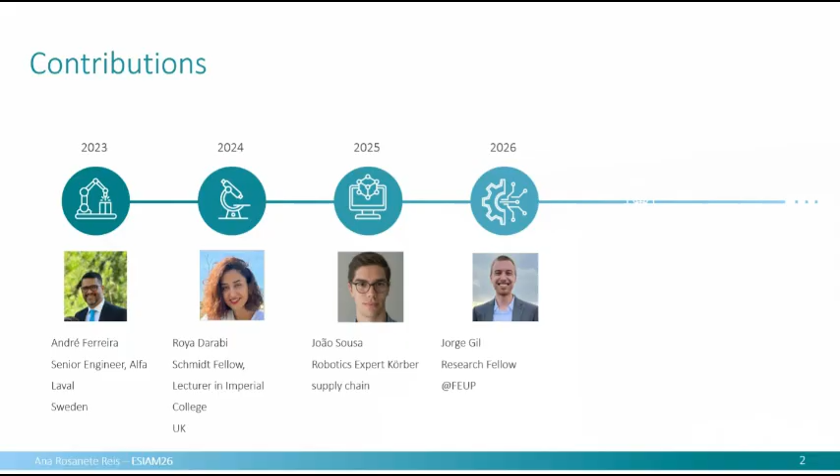So my role here is just to present our framework and to try to make some connections about all this work and probably works that each of you in some layer are doing. So that's how I will start. I will start from process physics. Everything that I will show here is about directed energy deposition for repairing. So this is the focus of our work.

The first part will be mainly about deposition, getting to know the process, a lot of test and trial, and understanding all the implications between material, process parameters, and what you want to know, melt pool, and then affected area, everything comes from there. And then we tried to predict something. So we try to go from physics to prediction.

Then I will show you our multi-scale modeling attempts to try to understand everything. At the same time, we understand that we need to control the process. We need to have actual autonomous control, not just fixed control. What we want is to have less defects and have a controlled process. So we went to machine learning.

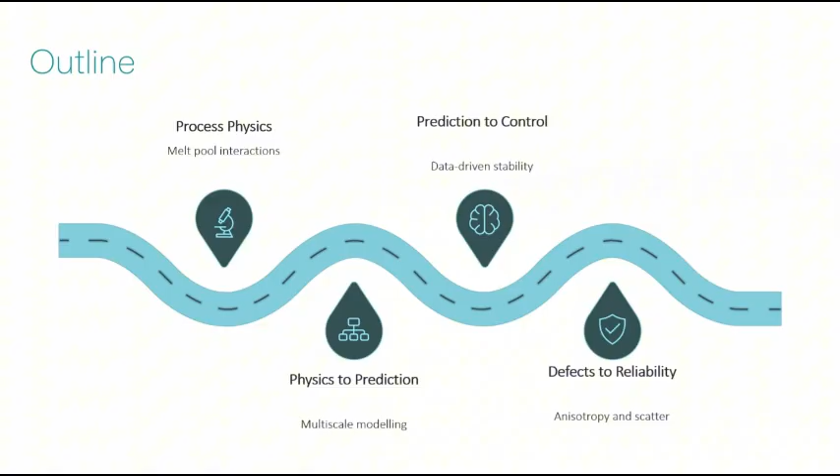And finally, we were studying and understanding better the defects to reliability, the work of Gil. But just for a very quick introduction. The title of my presentation is towards sustainability. It's a nice keyword, everybody likes to use this, but we need to understand how it can be sustainable.

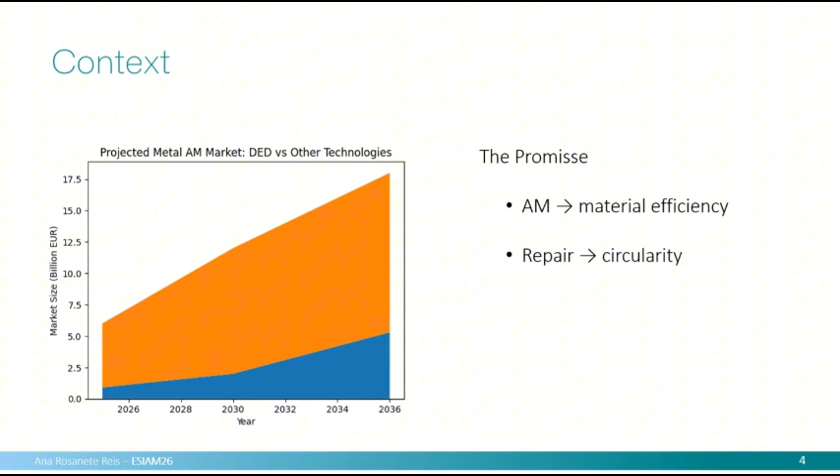Of course, if we are talking about repairing very expensive and high-end components, repairing for sure is a very good idea. And AM brings that background that we expect to work. But still, we need to fulfill one main question, that we keep reliability. I will present also some particular industrial cases that we've been studying, but mainly you have there the potential. It's better than cladding because we are using laser, so you have more control of the process. We have better control of the dilution, of the heat affected zone.

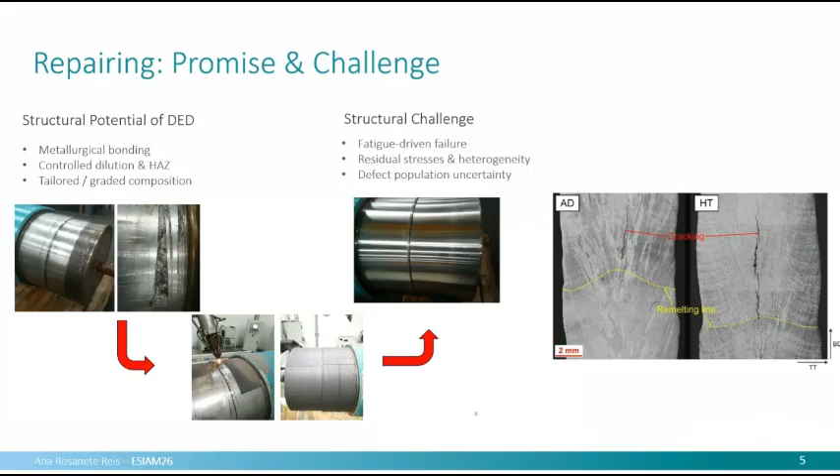We can also, and that's an important work that we're trying, grade materials, so we can combine compositions in order to have better adhesion and then have bigger hardness on the top. So that's a bonus that we want to find in additive manufacturing. But then, of course, you have all the structural challenges with fatigue, residual stress, and defects.

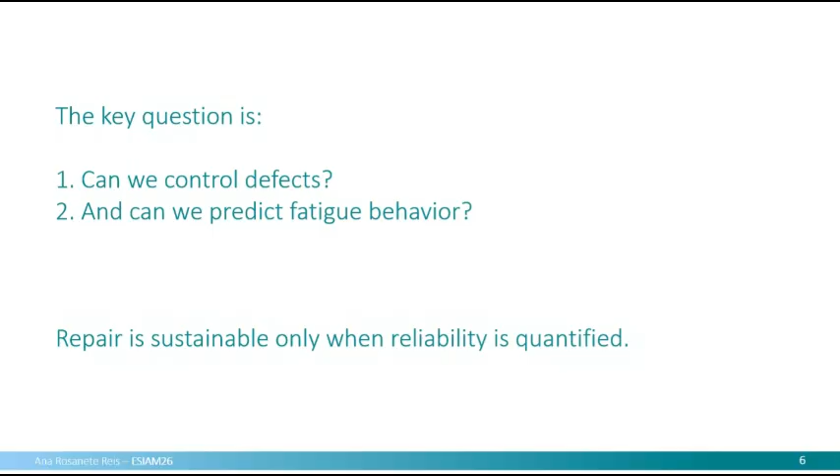So the questions of all this are: can we control defects? Can we predict fatigue behavior? When we can answer these questions, then we can really say that repair is sustainable and is an option. So in the work that we performed, we have Inconel as a deposition material. We tried also an important material that is used for metallization in some repairing situations,

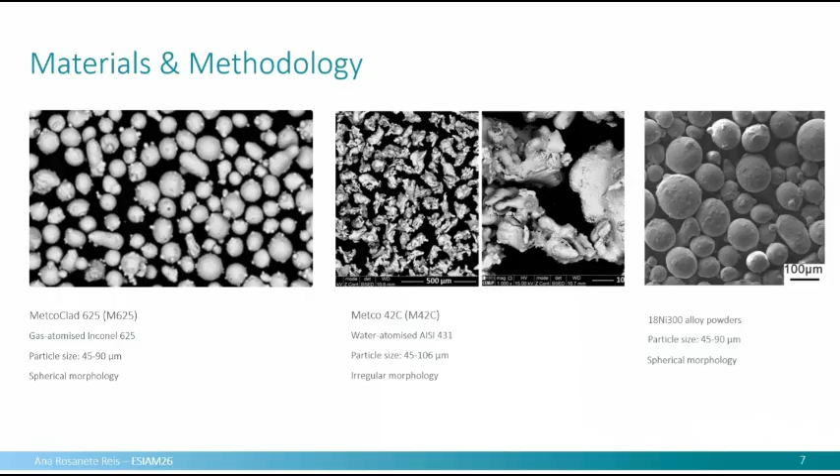because it brings hardness that we need when you're talking about gears. They are cemented, and then we need a layer of high hardness. We don't want to heat treat the whole gear. So we try to deposit this material. And finally, I will present also some work about maraging steel, because it's very used in additive for repairing molds, since in Portugal we have a big industry in molds.

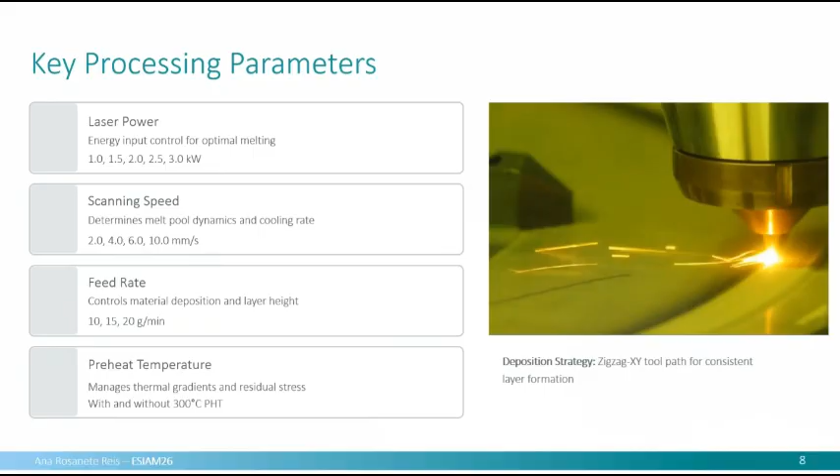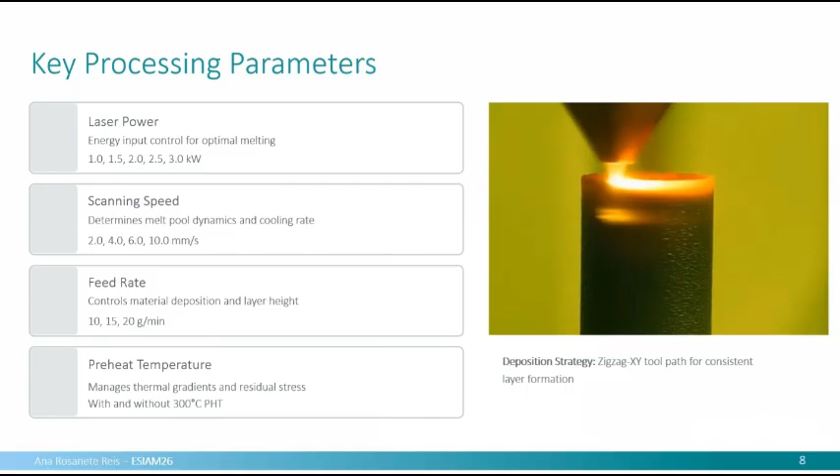So, materials and methods: you have the processing parameters that you could change. You have the laser power, the scanning speed, the feed rate, and also an important parameter, the preheating temperature. So we used this to understand how we could improve directed energy deposition. Our first attempt was going to physics to understand what type of defects we will get and how we can improve this.

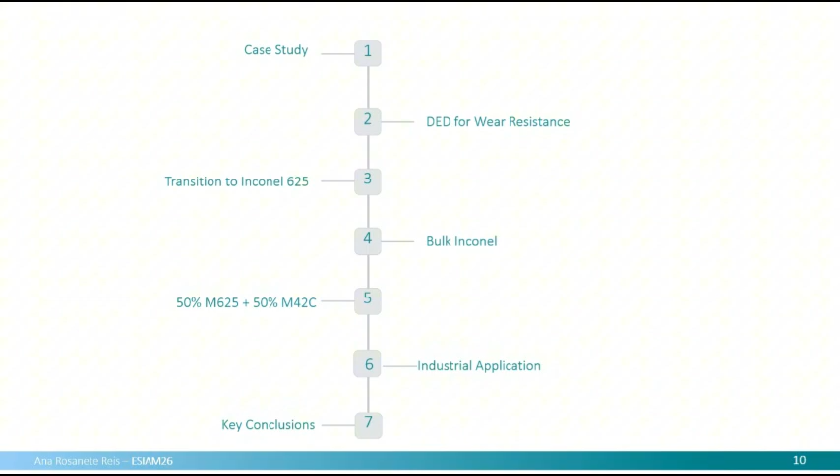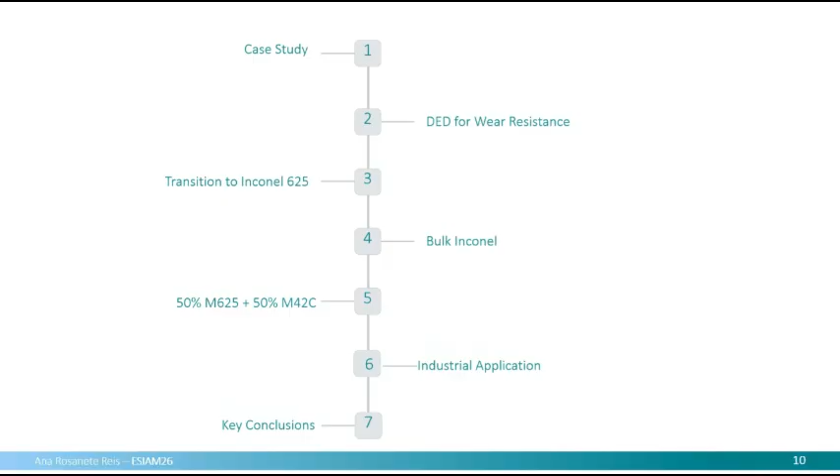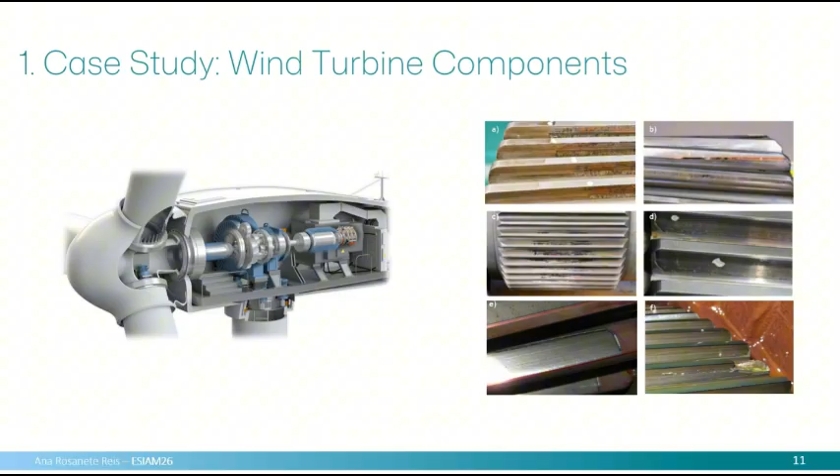This was André, my first PhD student's work. We started with a real industrial case, a company that wants to refurbish some components for wind turbines, and we did all these attempts that I will detail in the next slide. So this is a company that repairs shafts and gears from wind turbines. So a big challenge.

What we had in the first attempt, we tried to improve the... maybe this is have a... Do I have like a, yes, a pointer.

Oh, good. So we tried to improve the wear resistance. That's why we tried this material. This is a material that has a very high hardness, as we will see. And we tried to understand if we could deposit this material on the substrate. What we want when we start experimental work is to minimize clad depth, of course, and also get some kind of dilution that guarantees us the bonding that we need.

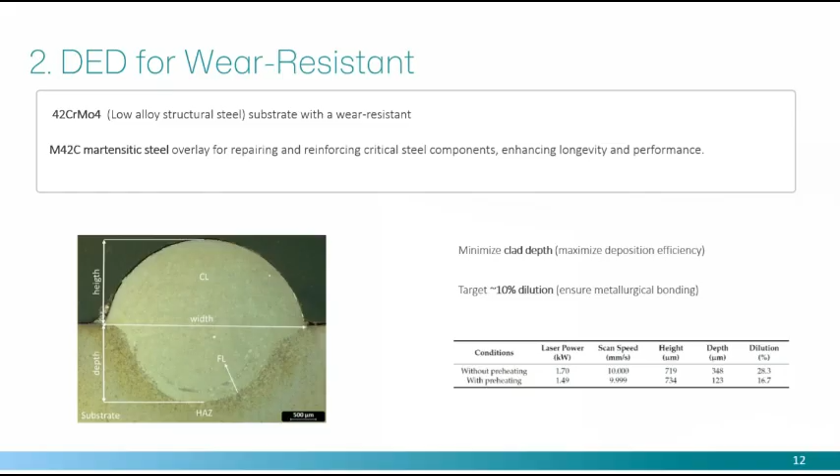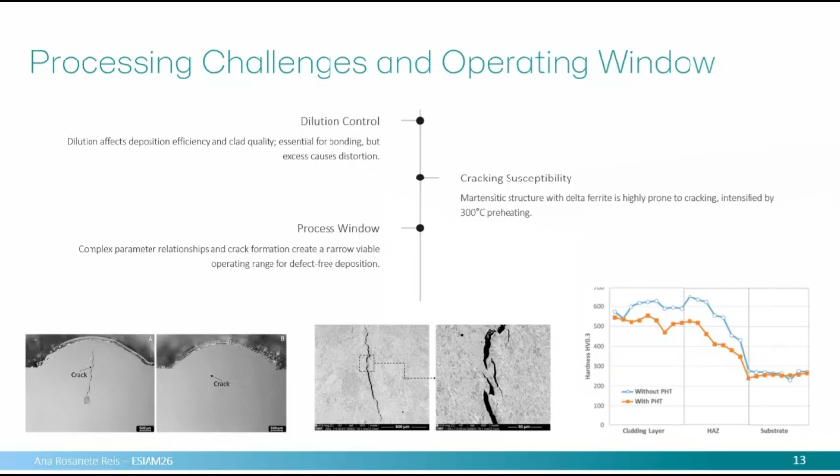So we tried to go to Inconel. Inconel is a much easier material, has very good properties in terms of direct energy deposition. And what we found, a lot of experiments again, but the good thing, we had a very big process window. So we can change the parameters. Laser power was one of the most interesting parameters, and the deposition and feed. And then we see very nice deposition with very good microstructure. It looks very good, planar.

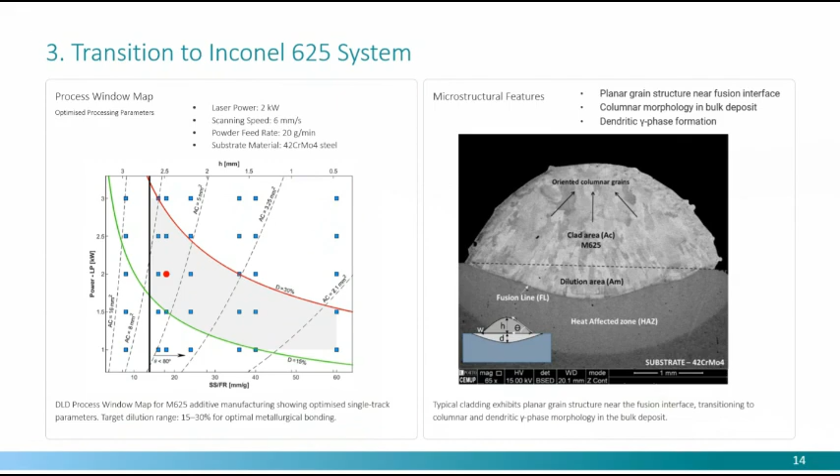And then we went to see results in terms of microstructures and also hardness. What we get is that preheating is very good, because it homogenizes a little bit the interface between the deposition and the base material. So we don't have this tendency to start cracking. So it was good, but you don't have a very good hardness. We go to 300 HV. So this was good for filling, but not good for the last layers, because you don't have the hardness that we need.

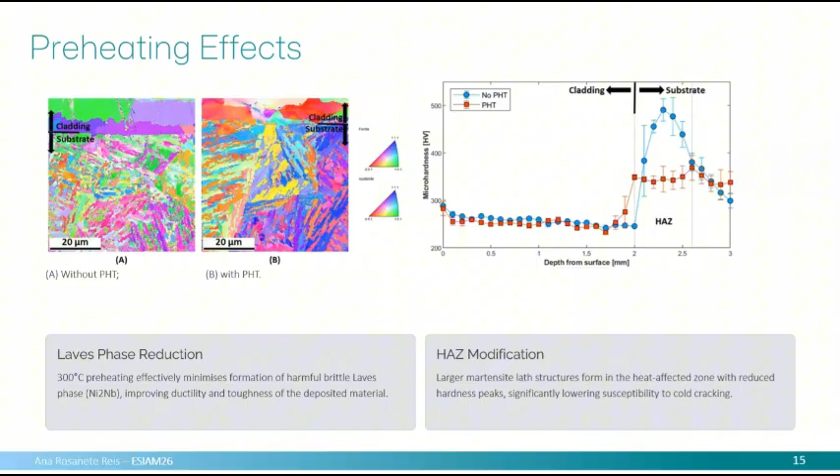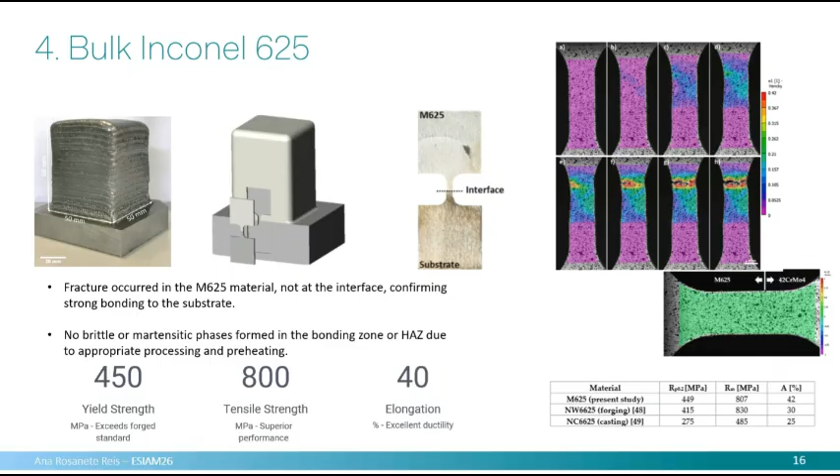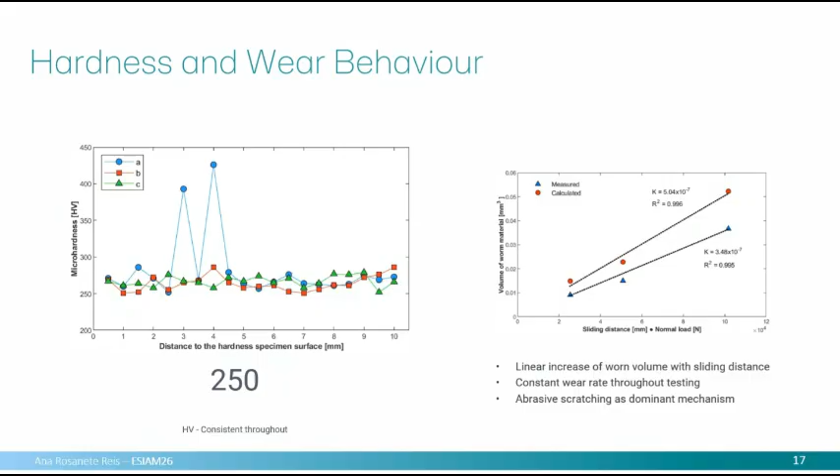Important points: we get the same result as wrought steel, so we have the same type of yield strength, and it has good ductility. This is good for this type of application. So this was a good start. You could make the bonding, and you have good mechanical properties. We didn't have the hardness that we need, because the goal was for the gears. As expected, the wear behavior was not so good.

So then we thought, why don't we mix the two materials, and see if we get an improvement in hardness. We did it like we show here. We tried 100% Inconel in the base, then started adding a little bit of M42C, the hard material, until the final layer is totally hard material. The conclusion is that after 50% we don't get good depositions, you get cracks. So we understand that this is the maximum content that we could use.

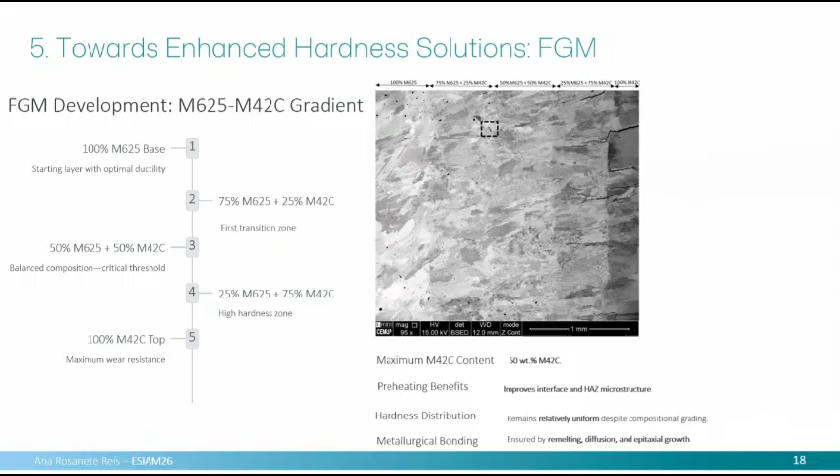So then we were studying these materials. We did the same thing again, built some bulk additive parts, and studied the interface, and the conclusions were interesting. We get almost the same properties as Inconel, and we didn't increase the wear behavior, so we get the same hardness. This is not very interesting, but for the company we were working with, it was quite an interesting solution because of the price of the materials.

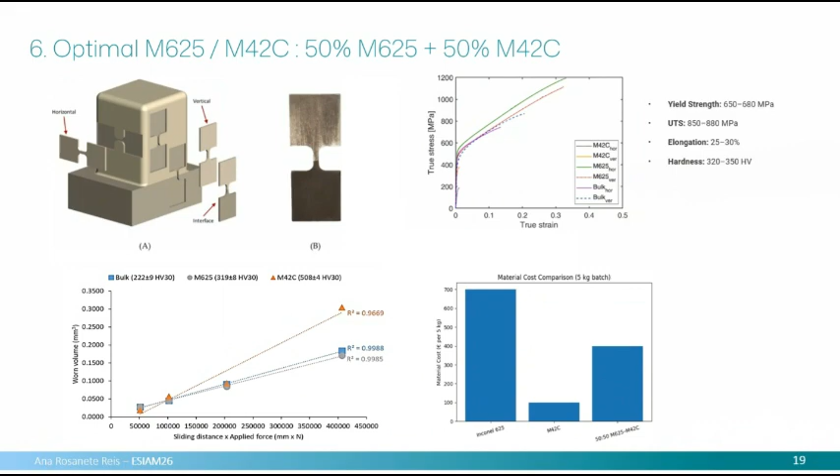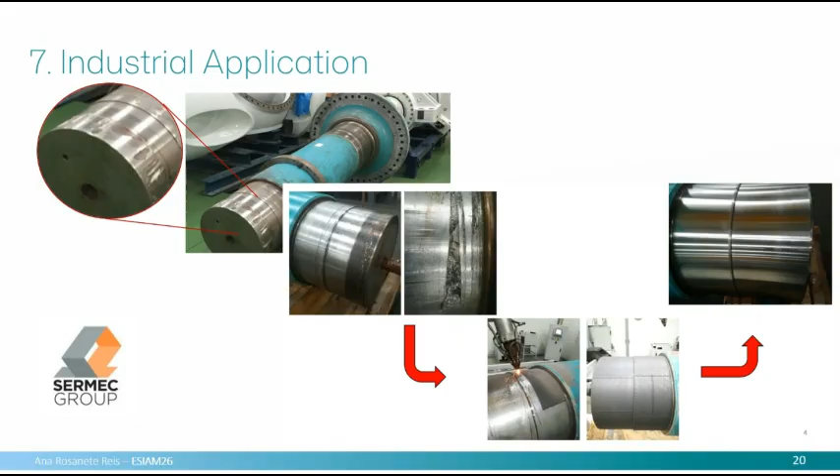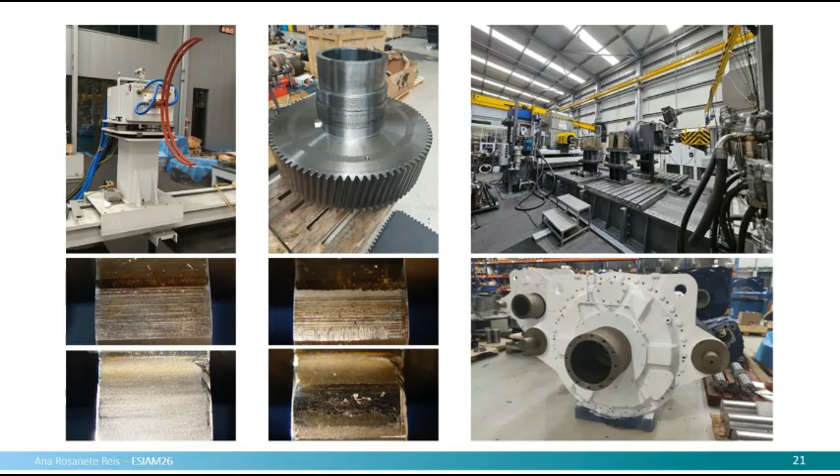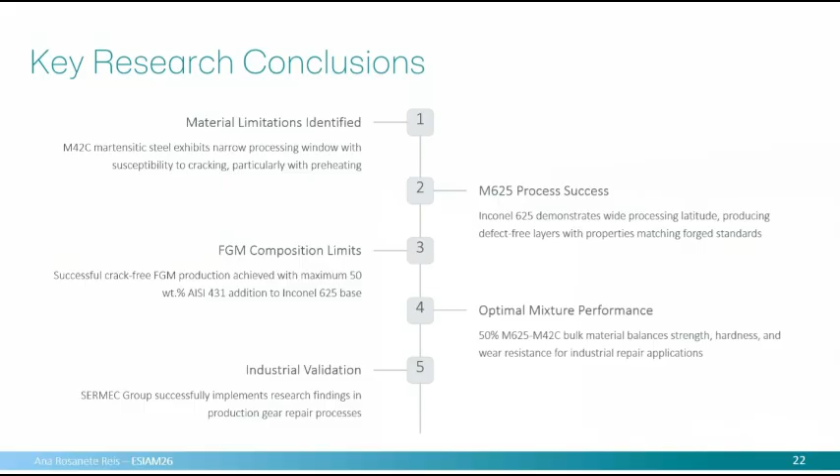The company even installed induction heating for the preheating, but with this material we could not get the results. So, conclusions of this work. This was the first part. Material limitations: Inconel works, FGM has limits, we got these limits, we validated in shaft components. But the main point of this work is that at the same time we were trying to understand all these, we did a lot of experiments, a lot of characterizations, and all this work was used in the next steps by the modeling and also by the control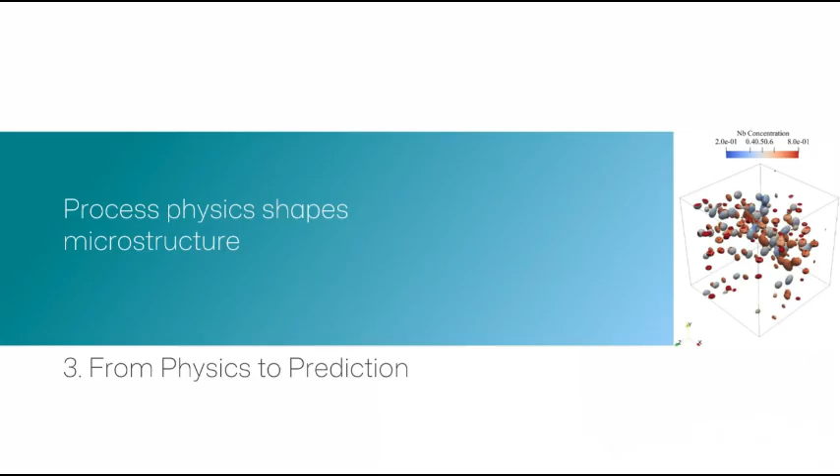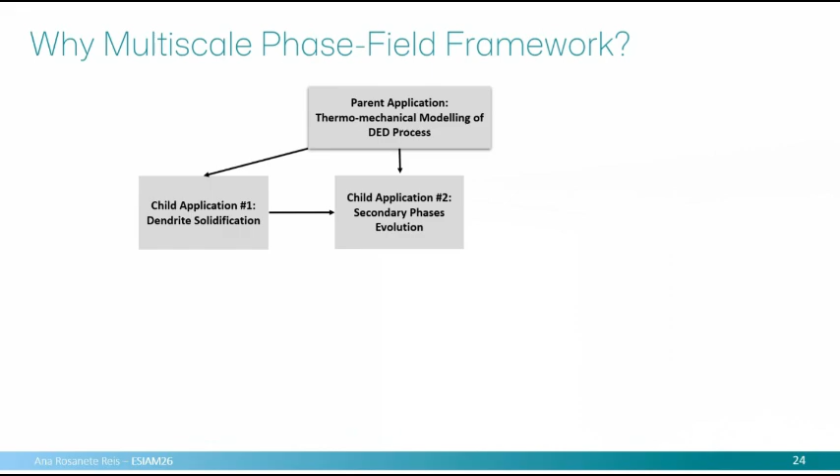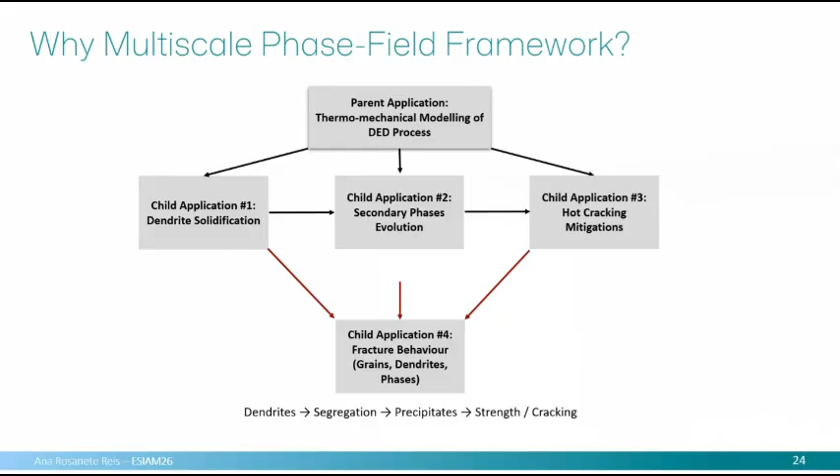layer of this framework. So in modeling, what we tried to do is build this very nice framework where you go from thermomechanical modeling, so macro scale modeling, and then you go to dendrite solidification, secondary phases, which in the case of Inconel is very important, and then predicting hot cracking. And finally, if you can use everything like this, you can maybe achieve some indications for fracture behavior. So this was the numerical framework that we tried to develop. So dendrite, segregation, precipitation, and some information about strength.

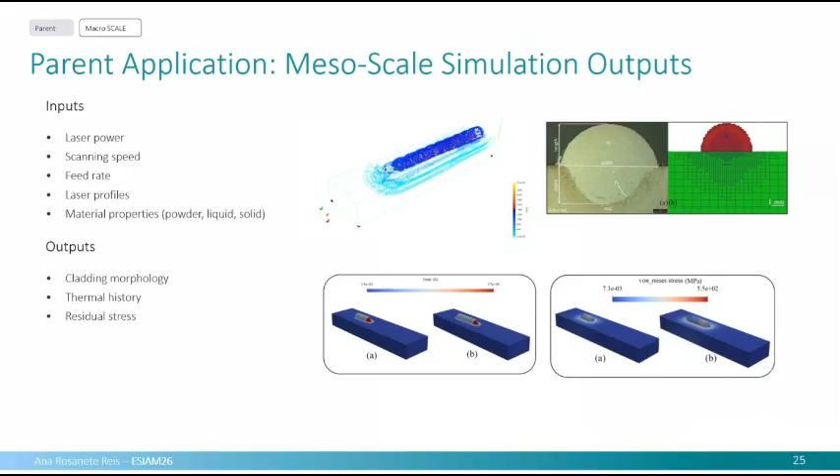So first step, with the experimental results that we had previously, we built this macro scale application where the inputs are the process parameters again, and then you have the outputs: the cladding morphology that was validated with previous results, the thermal history, and the residual stress. With this, the ambition gets bigger, and so if you have the thermal history, why not go to the microstructure and try to model the microstructure behavior? So we tried this, and we got some good results for the primary dendrite arm spacing.

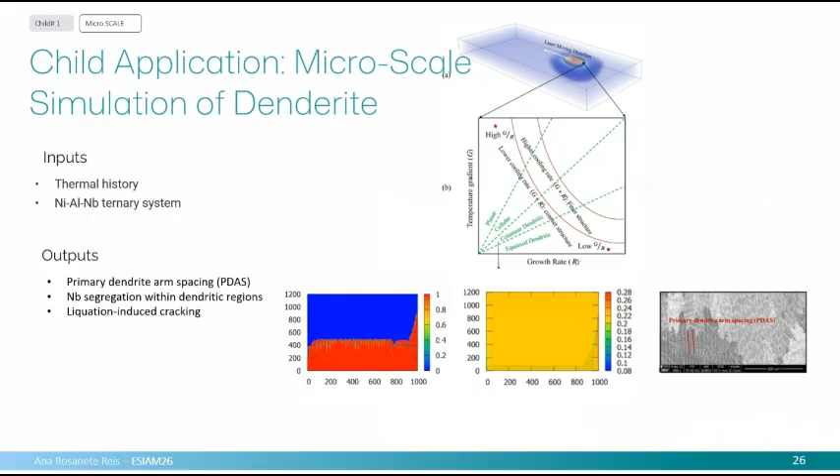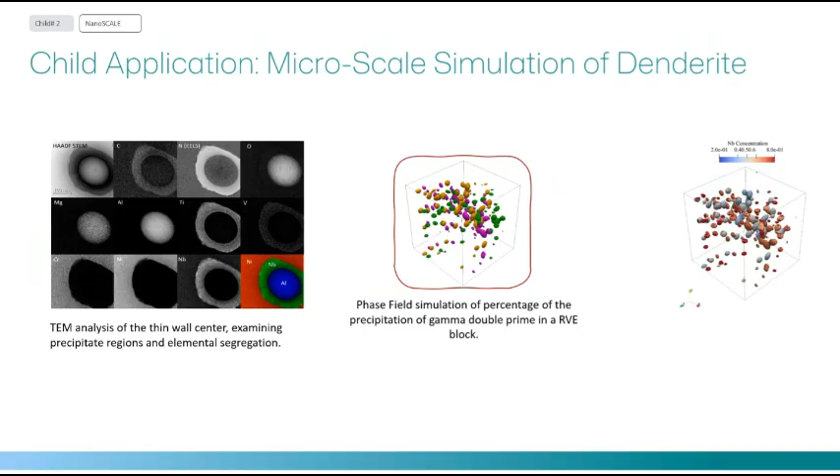But then we found out that Inconel is a very complex material, and it segregates some phases. So we need to go one scale ahead, and we go from the micro scale to the nanoscale, I think, to do the precipitation modeling. So this is quite interesting because we could also make some validation. And this is important because then you can understand where in the component is the ability to form cracks. And then you go back to meso scale, and then we have everything to try to model the crack behavior.

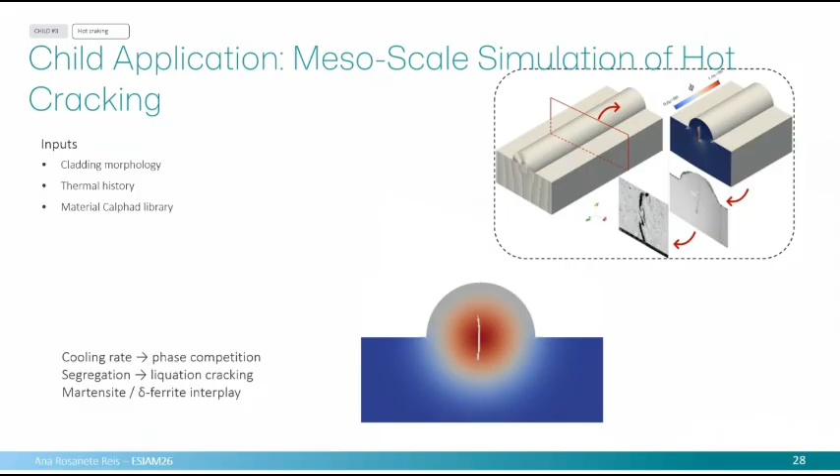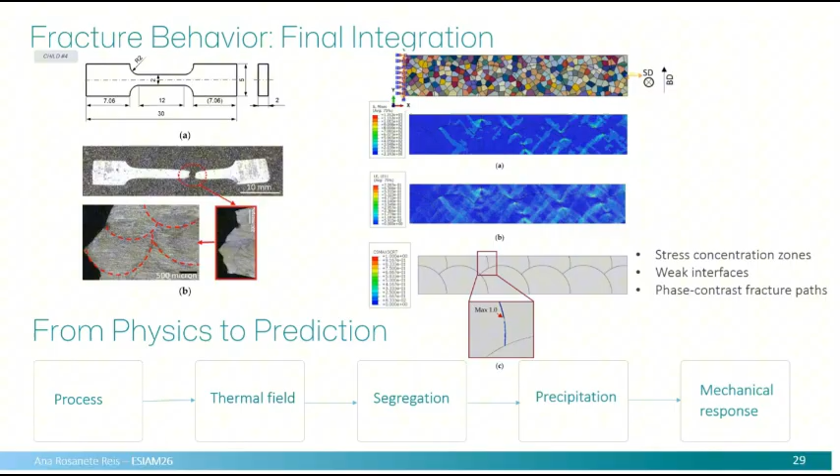Finally, the ambition got bigger and bigger, so we tried to join everything and go to fracture behavior. That is the important part. We don't try to model the crack. We try to model the stress concentration, the weak interfaces, and with that understand the proneness to fracture. Okay, so this tries to link all the fields. So the next step was, we understand we will always have flaws and defects. So if you always have flaws and defects, the first problem that we should try to address is control of the process.

My field, I started in casting. Casting is a very uncontrolled process. I'm from casting technology. And when this trend of additive manufacturing came, I thought, oh, this is perfect. I can control layer by layer the casting and the morphology. We can do a lot of things, but no, it's still a very complex process with everything happening. But at least we can have more information, and that's what we try to do.

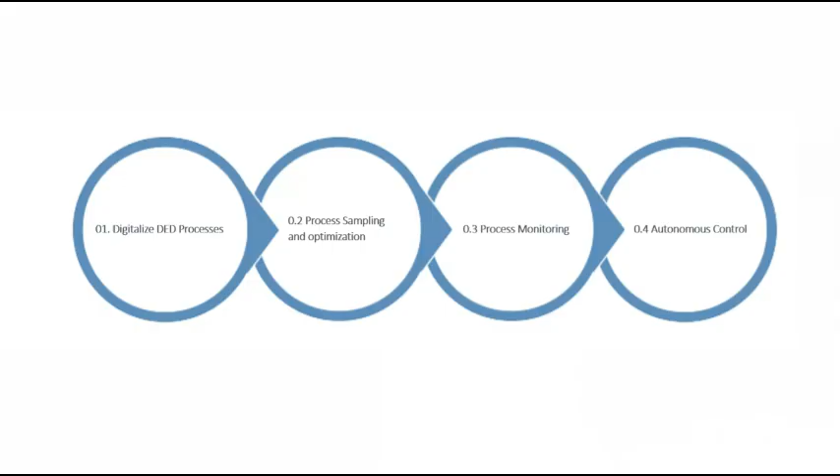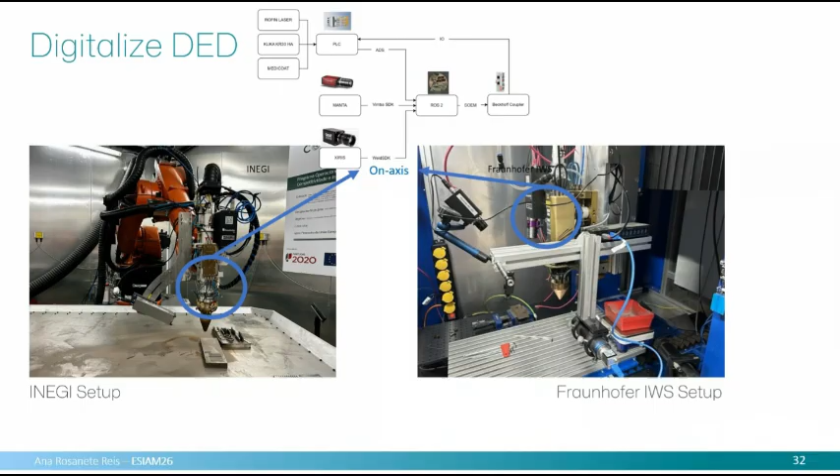So we tried to put more sensors in the process. We tried to implement a new monitoring system, and then try to make autonomous control, so closed loop. So this is another work that we've done, and in order to have some credibility, we tried to do this in two different places. So at INEGI, where we did all this work with our installation. This is our installation for cladding, but also in Fraunhofer, in some collaborations, we tried to implement the same thing. So the same system with different cameras: you have a camera on axis, and you have a very expensive camera off axis that gives us a lot of information.

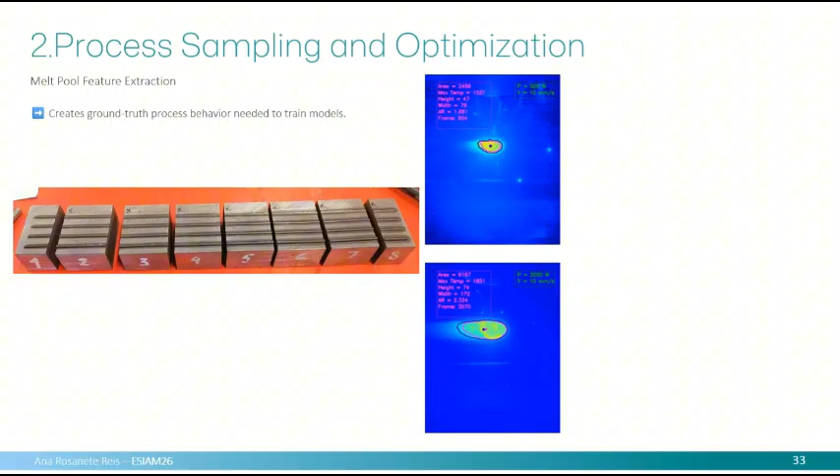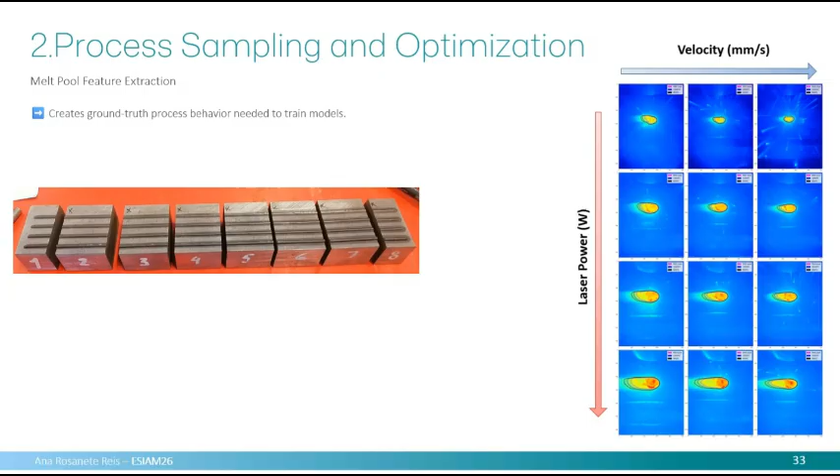The first step, sampling. So all the things that we did before are the results here that we used to make a data set with that sampling. So I think this is like parallel work. The same work was used to do these samplings. Then we could understand the relation between what we are doing and the image from the cladding. So this is the control factor that we tried to implement. And then we implemented this monitoring model that starts with an image, but then compresses it to a very simple vector, embedding all the information. And then it can also reconstruct another image.

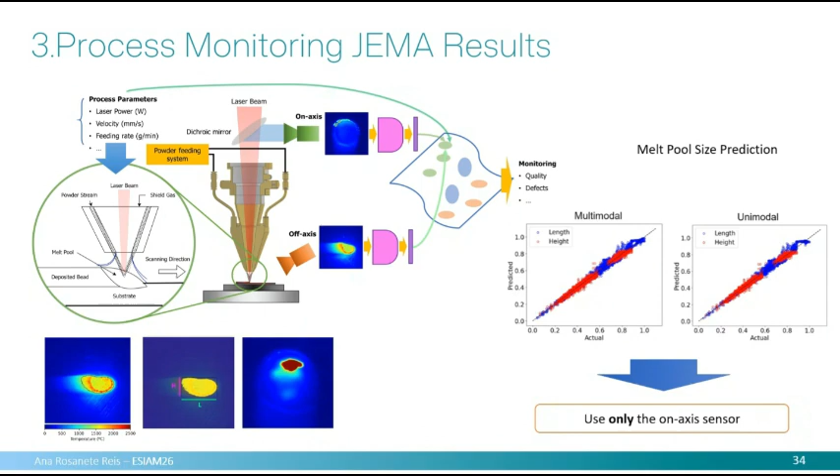A very important part of this work is that with one of the sensors, which is very expensive and you cannot use all the time, we could teach the other sensor that is on axis and very cheap to understand what it's seeing. So this allowed us to use only this very simple sensor. And this is just for monitoring. So we know what we want and we say that is okay or not okay, but then we tried to go to the control. So we used all this data that we have to offline train this controller.

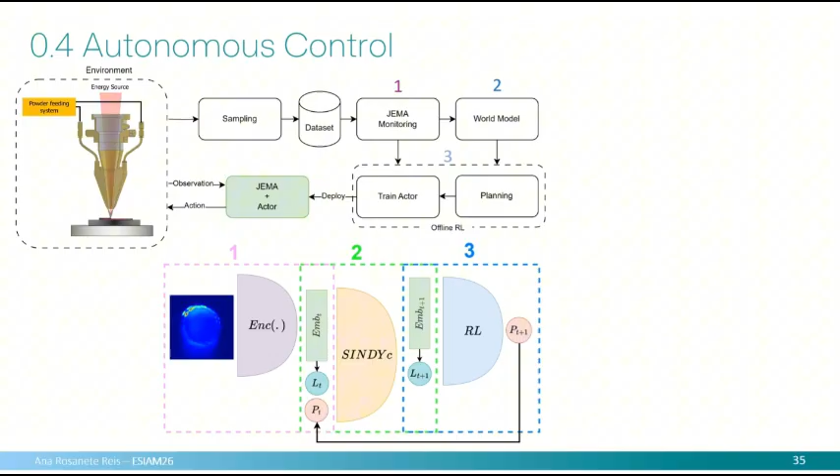And with this, of course, this is valid in this range, we could actually build a control system based on image. So we could get these good parts with live control, let's say like this. And this was also a very important part of the work.

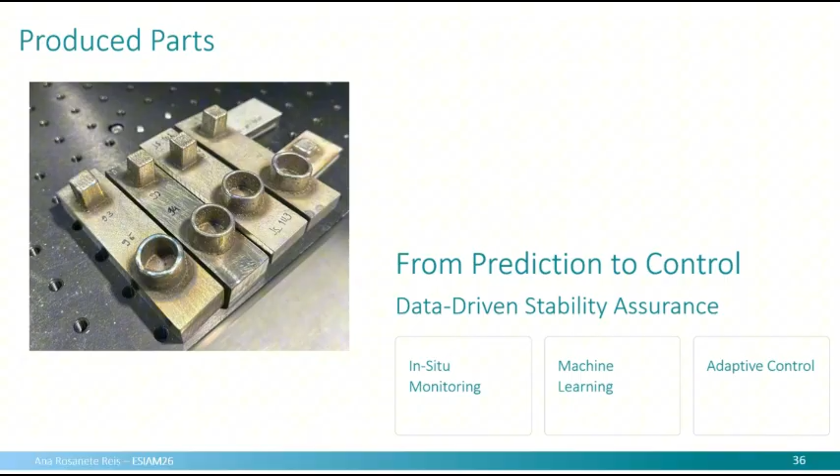So after this, then comes Jill with all this work to do to understand the impact of the process on the properties to fracture. So we try to go from defects to structural reliability. That's why everybody's here. So only now I'm showing some nice curves.

So in this work we had to change material, because we had another challenge there. We changed to maraging steel. This is another important application for repairing. So, for example, big molds use H14 as a base material, and one of the materials that is very competitive with that, and is very easy to deposit, is maraging steel. So we try to understand what happens with this material.

Again, we knew that the part that we need to understand is the manufacturing, because cracks will be initiated by the defects that come from all the process. Also, the deposition strategy will influence the defects, and also the interface, as we see. And this afternoon, you can see a lot of details of this work from Jill.

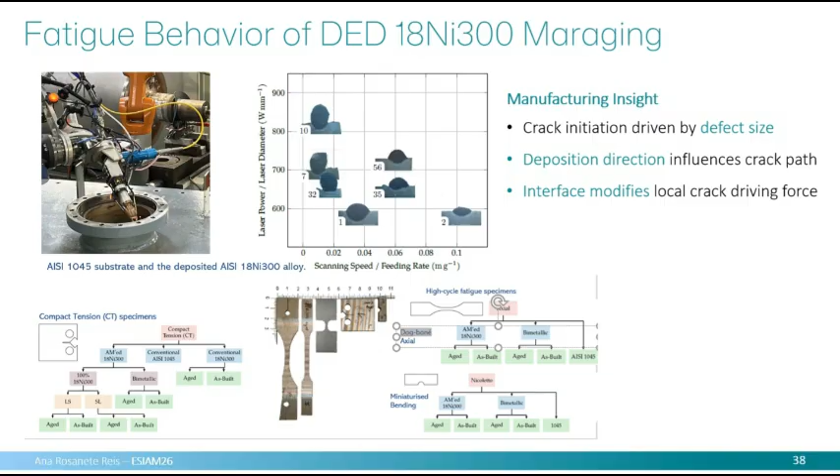So we did amazing work with a lot of experiments with different types of samples and a lot of depositions, with heat treatment, without heat treatment. So it was huge work to understand all this influence. So I will show you a very, very quick summary. So the main conclusion, so you have all the results here.

Of course, the crack propagation is totally dependent on the building direction, so it is direction dependent. For example, the base material has influence. We also did some base material samples where we could understand the influence of the base material. So it alters also the crack path, but also the scatter of all the results, as you can see.

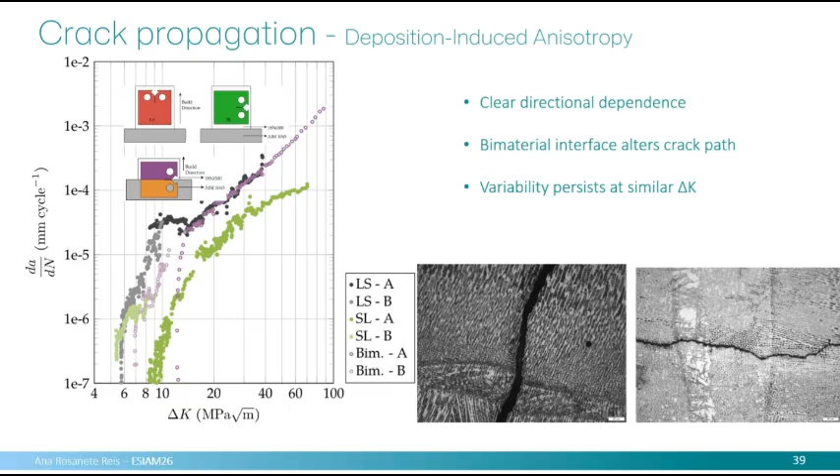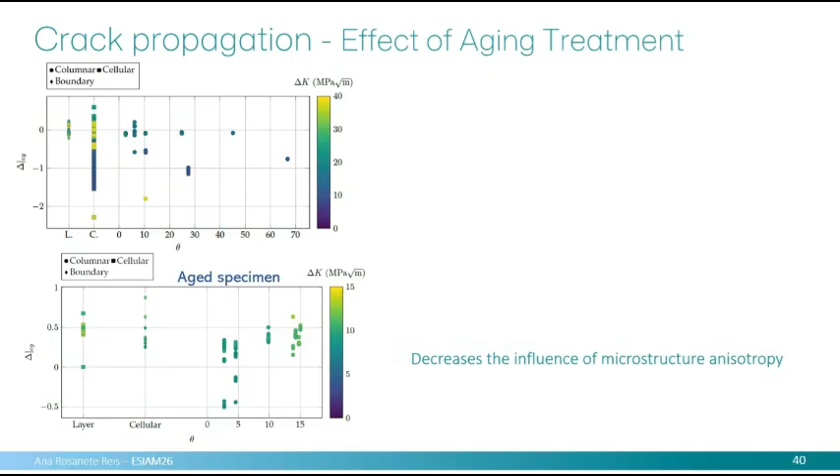Then the maraging, as you know, is a material that we usually need to treat. We did the heat treatment, and after that we understand that the anisotropy is lowered. So this is a good thing. But then when you go to fatigue life prediction, you see in the first slide, for example, one conclusion that was not so evident is that the heat treatment doesn't improve the fatigue life. So this was one thing.

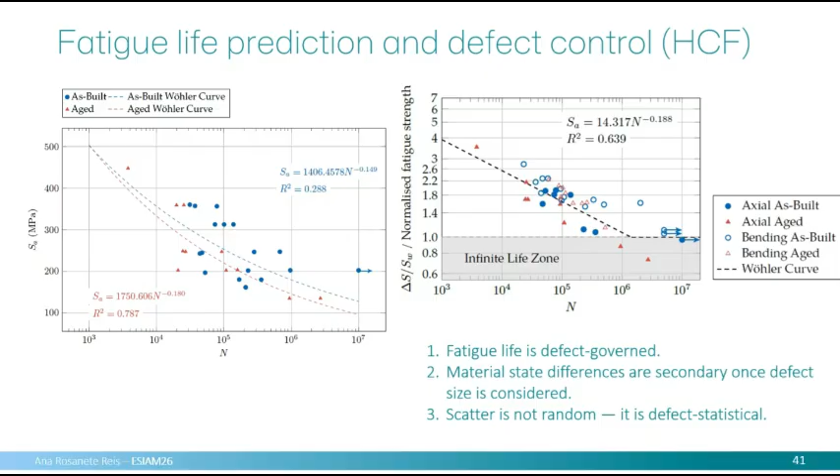Also the scattering again. But then when you go to the normalized results, you understand that we can normalize this, and then you have only the fatigue life governed by defects. So material is not so important. Material state is not so important. But we understand that we cannot predict. So defects, even if you minimize, if you reduce everything, are still quite statistical.

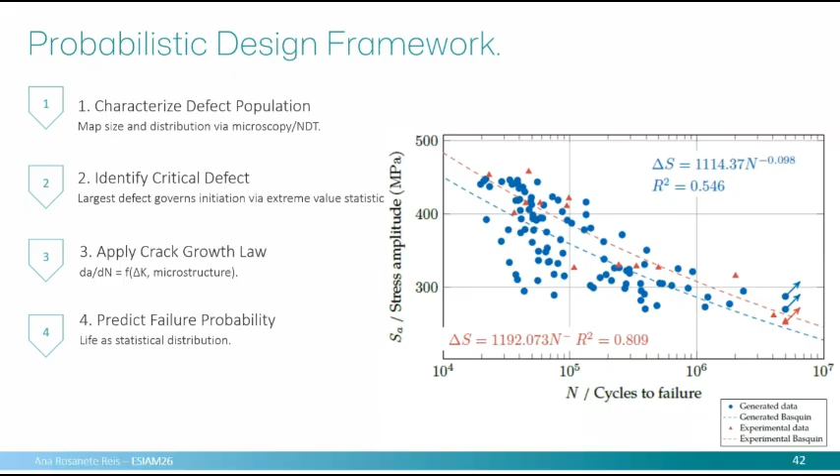So then we try to make this design framework where we base our predictions on some characterization of the defect population, then also identifying the critical defects, and then applying the laws as we know. Of course, this may seem a little bit not connected, but all these blocks, all the data, all the information, all the predictions are trying to be put together in order to have a big framework of all this. So you have modeling, you have control, and now you have fatigue prediction.

So summarizing the key findings in this layer, fatigue is governed by the biggest defect. Crack growth, of course, is microstructure dependent. Scatter is what we get, but my big conclusion is that reliability begins in the process, and that's my field. So when you are repairing, you need to look at the process, and the design of the repairing process is a constraint that you need to account for in order to predict your component life.

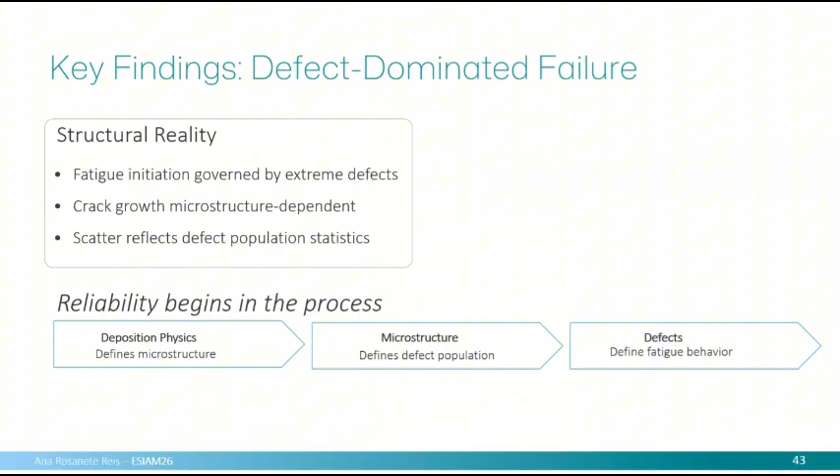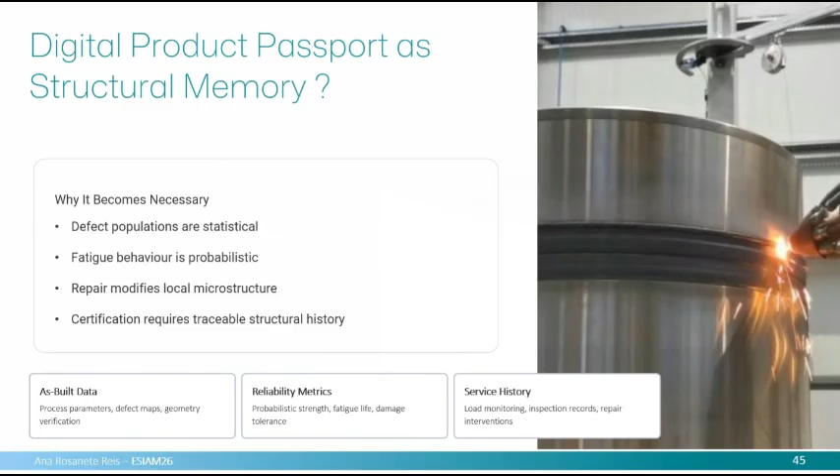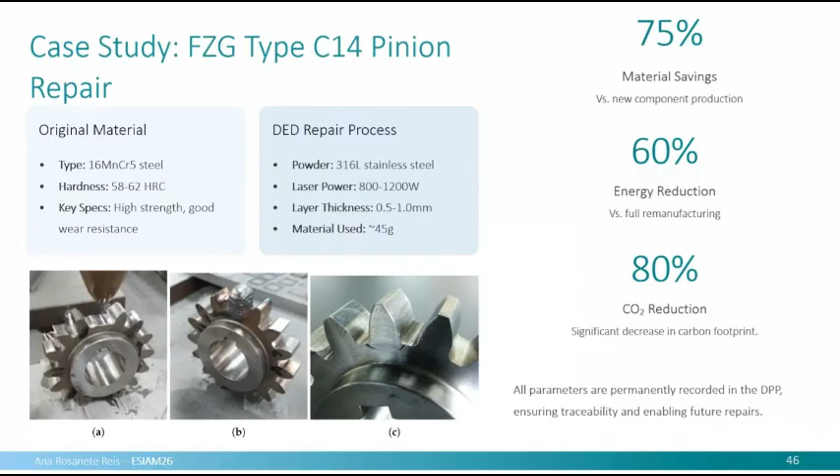So you have all these inputs that you can use, and then we tried this very simple example with one repaired part, a small part there. So you can use an ID for your part, track all the information that you use from the base component to all the depositions. So you have the nice chart that everybody wants to look at. So you have material savings, you have energy reduction. That's the good part. But most important is to keep all the data and to use that in the next step.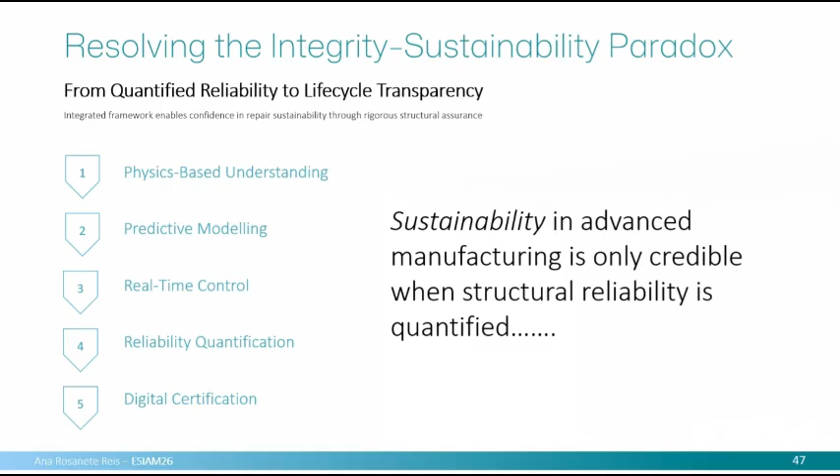So finally, everything that I was trying to present here, a lot of information, a lot of different subjects. But to summarize, everything starts from physics. You have the predictive model, you have the real-time control. Everything is trying to predict defects and help in the reliability quantification. And all of that should go to certification, and the product digital passport, I think, could be a really good tool for this. So that's my presentation.